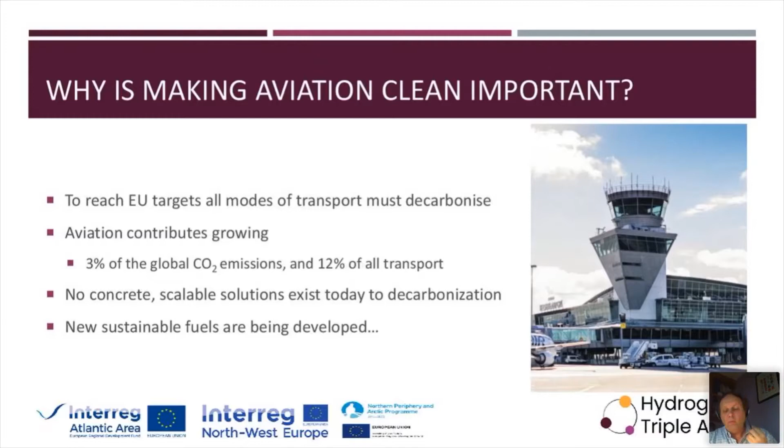I know we've all done our bit in recent times through not being able to go anywhere through this pandemic, but we do expect to be able to travel, hopefully again in the summer, and we will see these emissions once again grow. So what options do we have? What sustainable fuels are coming? I think there are two normal carbon-based opportunities or carbon-based fuels going forward.

One is synthetic fuels. In a synthetic fuel, you have a green source of the CO2. That could come from biofuels themselves, or it could come from the atmosphere, collecting CO2 out of the atmosphere. Or it could indeed be a waste. So you've got CO2, you try and combine that with green hydrogen in a production plant, and you synthetically make the carbon-based fuel that we historically have had available to us through fossil-based solutions. That's one route. Another route is to use the biofuels directly in air transport themselves.

And going forward, that could be something that looks like crops or algae, or even waste oils being used to actually produce that fuel. And I think the application of that into air transport is possible, but it's not one that we see as being completely viable in the longer term, because, to be honest, there just will not be enough biofuel going forward. The other issue is that even though we have produced the fuel in a green way, we still emit CO2 at that particular point of use. And that's something which governments are trying to get away from.

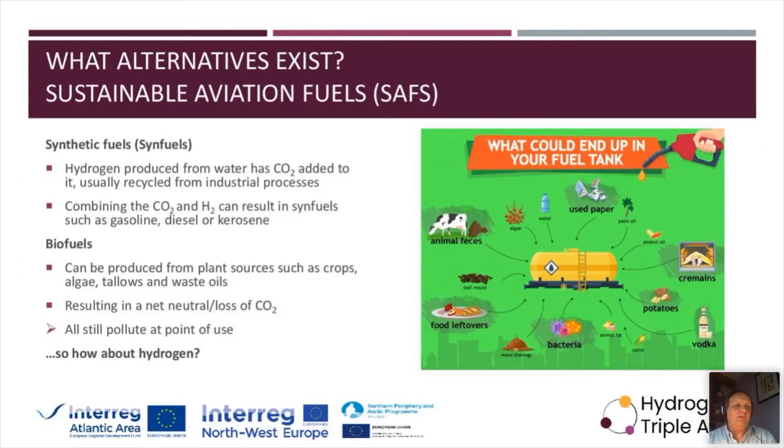So the question has always been asked, well, what can hydrogen do in this particular context? We've used hydrogen in transport for ages, and I could have put a picture up here of an airship, but that's a bit emotive and probably a bit more removed in terms of time to how we would deploy hydrogen today. We all know and love the fact that we've been able to go into space using hydrogen. How do we deploy that hydrogen experience and technology in a slightly different way so that we can actually use it for air travel?

And what we're seeing is that we're not going to all end up in a rocket, much as Elon Musk would really like us to. What we're going to do is deploy those hydrogen molecules to systems that we have talked about already in this presentation, the likes of fuel cells and potentially hydrogen turbines going forward.

So we understand that technology can be adapted, and that we have the experience and the expertise to do that. The other element of that is how we get those hydrogen molecules to those aircraft going forward, and we need a large-scale infrastructure change to understand how that progress can be made for aviation. Added to that, we probably also got this

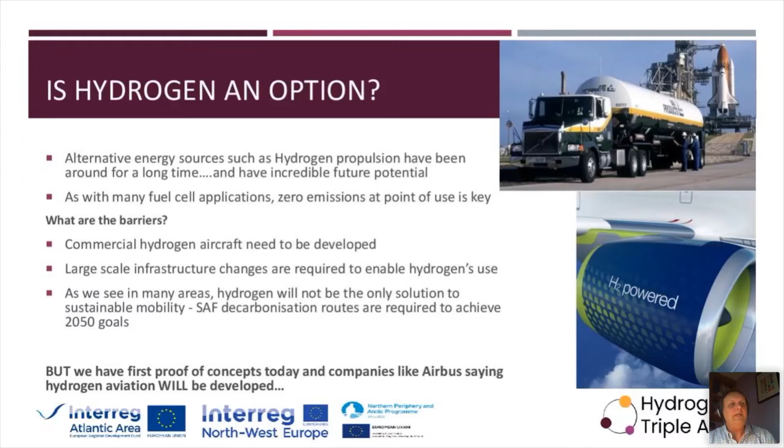opportunity for the bio-based and the waste carbon-related fuels as well, because hydrogen probably will not encompass everything, just like it won't in terms of land-based or marine transport. It won't be a one-size-fits-all. There's likely to be multiple fuels going forward. But what we've seen in recent times, particularly in the last probably 12 to 18 months, we know that proofs of concepts are coming forward. We see those actually operating today, and we'll talk a little bit about some of those later on. And we're also seeing companies like Airbus take a position in this going forward.

So if we can get the technology to work, then the next question really is, can we afford it? And when we look at these costs as to how hydrogen can participate over a long period, we've got to look at it on a like-for-like basis. In other words, the technology needs to be mature to be able to compare it to what we do today in terms of fossil fuels.

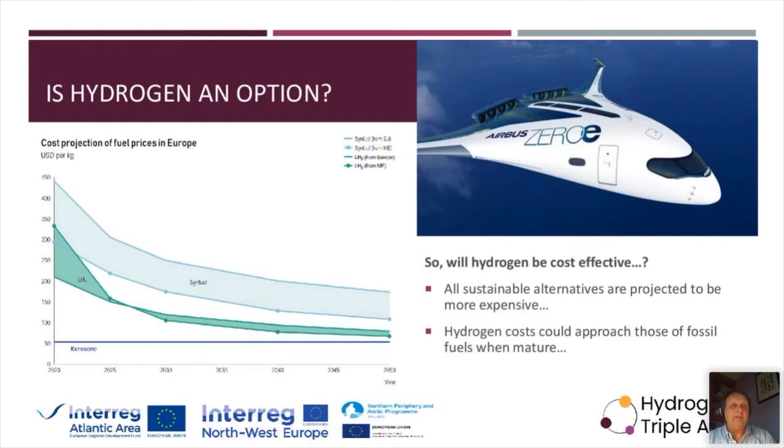And if we look at syn fuel versus liquid hydrogen, and yes, it is liquid hydrogen that we're talking about putting on the bigger aircraft, we see that the cost of the liquid hydrogen approaches that of kerosene. It will never get to be quite as low as we currently enjoy, but we do get to that position of approaching it, and therefore it becomes a position that we can afford going forward.

So where do we start? I think the key here is, if you look at an aircraft, it's a very complicated piece of equipment. We have to break that one system down into its components and provide a series of coordinated steps to understand how the whole can be actually changed in terms of its running fuel. So we'll look at turbines, we'll look at fuel cells, we'll look at liquid hydrogen tanks, we'll look at lightweighting some of those systems so that we can get them off the ground.

We'll look at infrastructure on the ground to understand how we can get the aircraft refueled in the longer term. And we'll also have to look at the codes and standards that we employ to allow those aircraft and those airports to operate in a safe manner. So it's likely that we're going to take a progressive route to this, and the change will occur in smaller aircraft first. We'll follow that by commuter prototypes, and that point will probably test the liquid hydrogen infrastructure. And then we're going to look at the longer range aircraft, and that may involve, as I say, this alternative fuel.

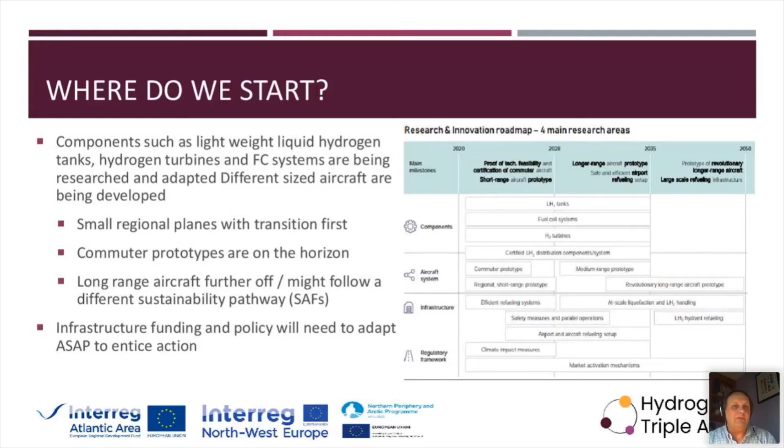So if we look at smaller aircraft, and there's not much of a smaller aircraft than a drone, we see that hydrogen has already made an impact into the drone market, particularly in terms of military applications, but also in terms of how those applications have then found their way into a commercial world. So we see hydrogen-related drones being used in agriculture, and for remote deliveries of essential items and medical supplies. And we see that hydrogen enhances the length of time that these drones can operate. It's exactly the same argument that we traditionally use within both land and water-based applications.

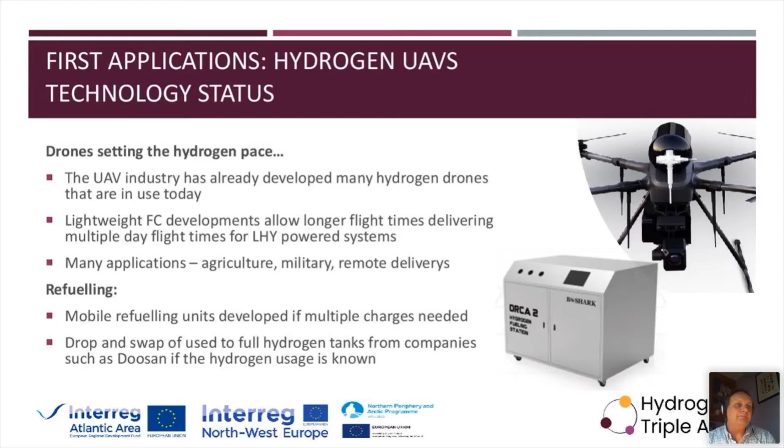And we've seen in the last 10 years, as these drones have been developed, the flight times of certain hydrogen drones are of the order of days rather than of the order of hours. We're migrating that now into smaller passenger aircraft, and I think many have probably heard of a company called ZeroAvia. They've been making quite a lot of headway in terms of their development of a small passenger plane. They started off with a small 6-seater aircraft.

They're participating in, or leading, a project called HyFlyer, which will basically allow that aircraft and some slightly bigger aircraft to be developed and to fly over, let's say, a 300 nautical mile range, and that's going to be from the Isles of Orkney to mainland Scotland.

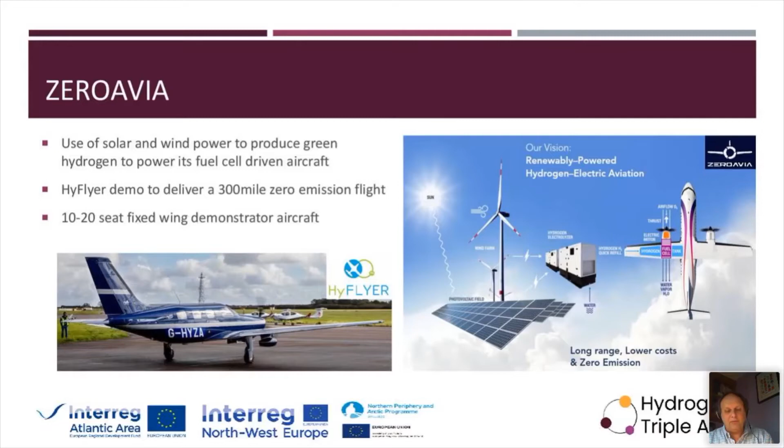So we see that these aircraft are in development. We see that their first prototypes are becoming successful, and that progress is being made on these smaller aircraft. But what that's leading to is effectively a momentum within the sector. Over the last 18 months, multiple studies have occurred, both from the aviation sector and from the hydrogen sector, that have said hydrogen can come to sort out the sustainability of aviation. And that's led to companies such as Airbus and Boeing getting renewed interest in hydrogen.

And Airbus indeed launched its ZEROe plans in the last 2 to 3 months. This involves the development of a whole range of hydrogen-powered aircraft, as you can see, of different shapes and sizes, which will take a while to come to an airport near you. But if we don't start today, they won't be ready by, let's say, 2035.

What this needs as well is a map as to how we make these progressions, and a long-term regional and global framework in terms of both policy and intent. The EU has set that out in terms of the transition towards net zero by 2050. The world has agreed it via the Paris Accord. So we have the building blocks. Now we just need to make the steps in terms of the actual technologies.

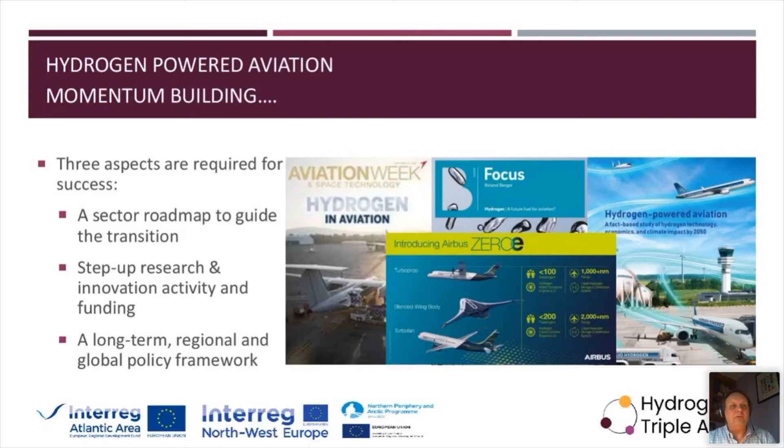One other project that I wouldn't mind mentioning is a project called Enable H2. It's a project that I'm part of through my role in the European Hydrogen Association. And it's doing the groundwork, I would say, in developing some of this aviation technology. It's looking at how we can design an aircraft using different liquid hydrogen concept tanks, how far those aircraft will fly, and how you can run a turbine on hydrogen without getting embrittlement of the components, for instance.

In the early part of the project, we developed this timeline, this view as to how aircraft could migrate towards hydrogen. To be honest, we think that the blue lines on the right-hand side are probably moving towards the left-hand side now, because the interest has stepped up significantly over the last couple of years.

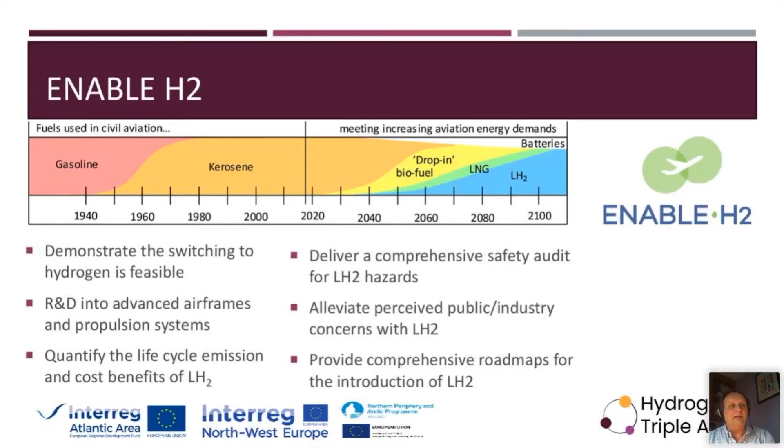So what do aircraft look like going forward, and how do we make this transition? Initially, we can bring hydrogen to bear within the cabin. We can look at the energy usage within the cabin and convert that to fuel cells. For very small aircraft, we can use fuel cells to power the engine. For regional, slightly bigger aircraft, we use hydrogen and liquid hydrogen to power hydrogen turbines to run the aircraft.

And as I mentioned before, we see emissions legislation tightening so that companies and airports don't really have a choice. They have to make this migration. So the initial aircraft will run on gaseous hydrogen. The bigger and more progressive aircraft, as we go down this timeline, will move to liquid hydrogen.

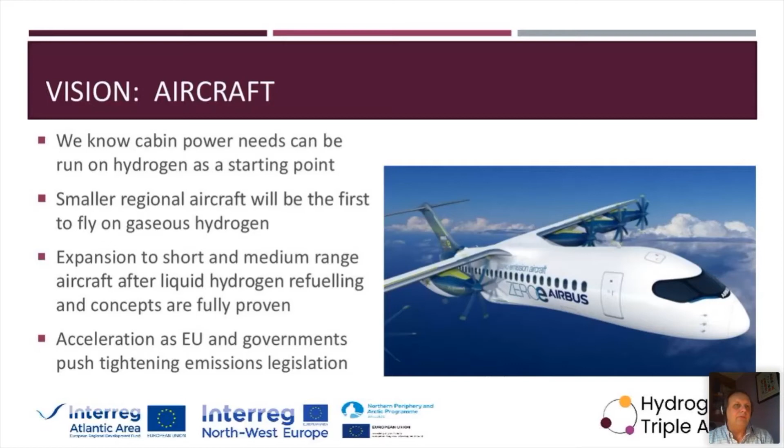What does it mean for airports? Well, an airport's going to look potentially quite different in the future. I think the concept most people have is, if we're making this transition with smaller regional planes first, then we'll see regional airports become users of hydrogen, and potentially that opens up a different network of airfields for people to use. In fact, in the UK, as you can see from that little graphic, you've got over 200 smaller airports which we don't really use very much today. So those airports could come back into service.

They could be used as hydrogen point-to-point locations for these smaller aircraft as an initial migration point. And if we look at remote and coastal communities, they traditionally have some form of regional connection by air, and those airports could also be an area of focus for this initial change.

Larger airports are going to look very different, because we perceive that in a hydrogen interconnected world in the future, we're going to have hydrogen delivered by pipe to various locations, whether they be industrial locations or right the way through to your own house. Those pipes will deliver the hydrogen to the airport perimeters, and then we're going to have to transition that gaseous hydrogen into a fuel that we can use.

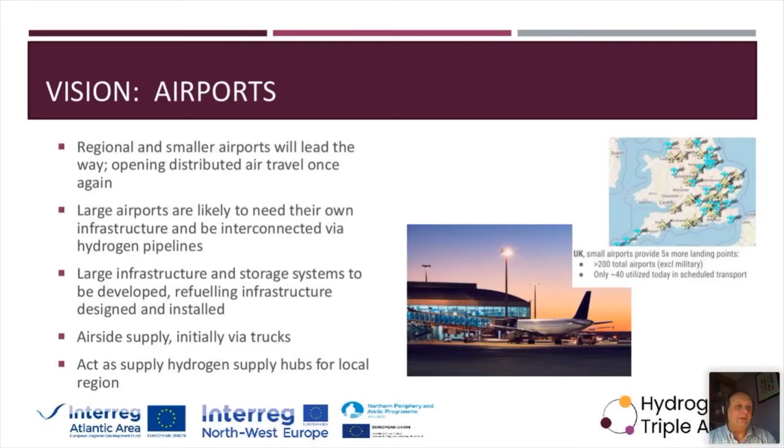In order to do all that, we need significant amounts of money. It's a massive transition, just like it is for land-based and marine vehicles. Air transport is going to need the same level of support going forward. The key will be how we interconnect all of those opportunities.

And we saw in the Green Deal that was put through by the EU just last month that airports are a centre of focus for them. They did commit many millions of euros towards airport transition. We'll see which airports begin to take up that opportunity when the results of those Green Deal proposals are announced in the next couple of months.

But we're also seeing national governments begin to follow the EU's lead there. And we're seeing the French strategic plan for hydrogen have a very strong focus towards aviation. That's probably not a surprise, given that Airbus have their engine testing facilities in France. And I'm sure that putting those two things together will allow Airbus to move forward with their hydrogen turbines for their bigger jets.

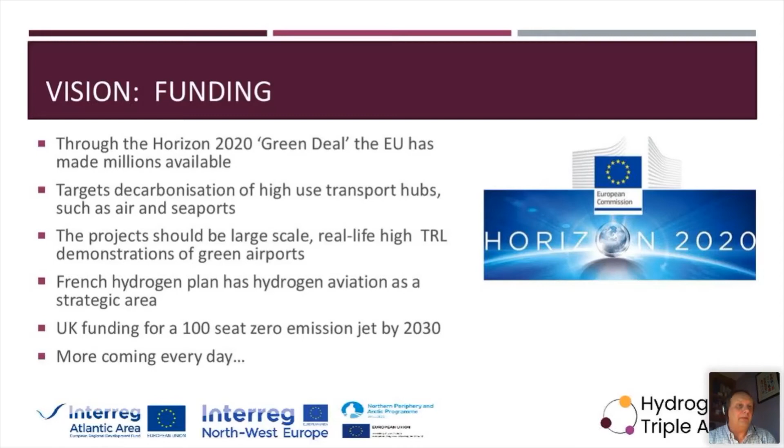Even outside the EU, it's getting very difficult to say that from the UK perspective, but even outside the EU, the UK is looking at funding a 100-seater zero-emission jet by 2030. So we're seeing that all of these governments are putting in place transition funding to allow companies to begin to innovate using public money. So what's going to happen next?

I believe that hydrogen is going to come to an airport near you in the not too distant future. I think that the regional and community remote airports are going to be at some of the forefronts of this technology change. We're seeing the first movers already positioning for this opportunity, and that governments are making funding available. So it's not the final call to get on board with all of this, but it's the first call for those hydrogen aviators to get on board.

And if you want your community or your airport to be associated with some of these endeavors, now is the time to begin to make connections within the hydrogen space to allow yourselves to become part of projects.

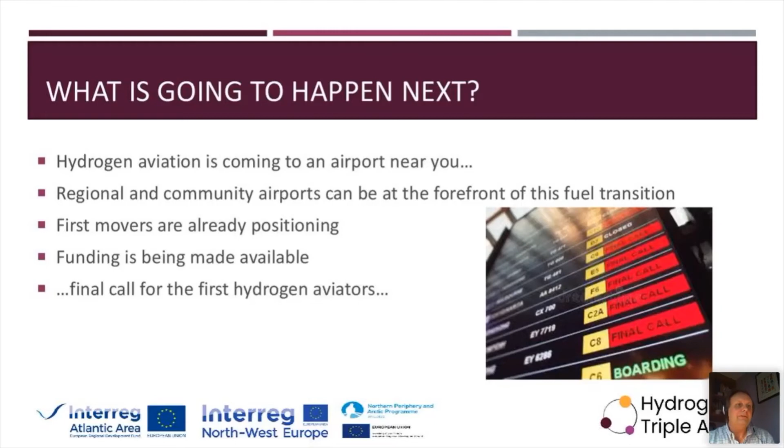Excellent presentation. We've seen the land, the sea, and the air, and that's different timelines as hydrogen is now, will be, and hopefully will get to. Quick couple of questions for you, Ian. You talked there about the hydrogen hubs and the EU Green Deal. How much of the airside traffic could be transformed to hydrogen before the planes, such as the cargo holding and all of that? Can you see that as a catalyst for growth in the airline side?

Oh yeah, definitely. We've done demonstrations about buses, about baggage handling, about forklifts. All of those technologies, to be honest, are getting towards being commercial, and we can employ all of those technologies at an airport going forward. If we add to that the planes as well, we see a complete picture becoming developed.

The key, as far as I'm concerned, is how you deliver the hydrogen to those applications, because the amount of hydrogen that we will require at, let's say, a large airport like Heathrow will be vast, especially when you also consider that it's in the middle of a community. And so you've got the impacts of safety, you've got the impacts of the local community. So airside is one thing, but we will also see these opportunities spill out from the airport into the local communities.